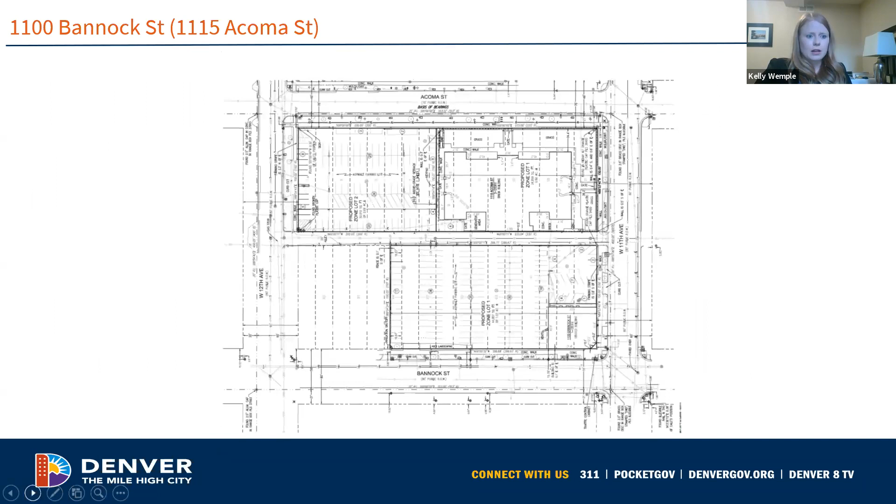All right, so next up we have one public hearing scheduled today. So the process is up on the screen. You can see, I'll go ahead and announce the public hearing, and then staff will introduce the application and make their recommendation. Following that, we'll have the applicant presentation, and you have up to 10 minutes to present. Make sure to get it all in the 10 minutes, because once we hear public comments, we won't be able to come back and talk to you after that. We'll move straight into deliberation. So after that 10-minute applicant presentation, we'll open it up for public comments. For public hearings, we have 3 minutes each for public comments.

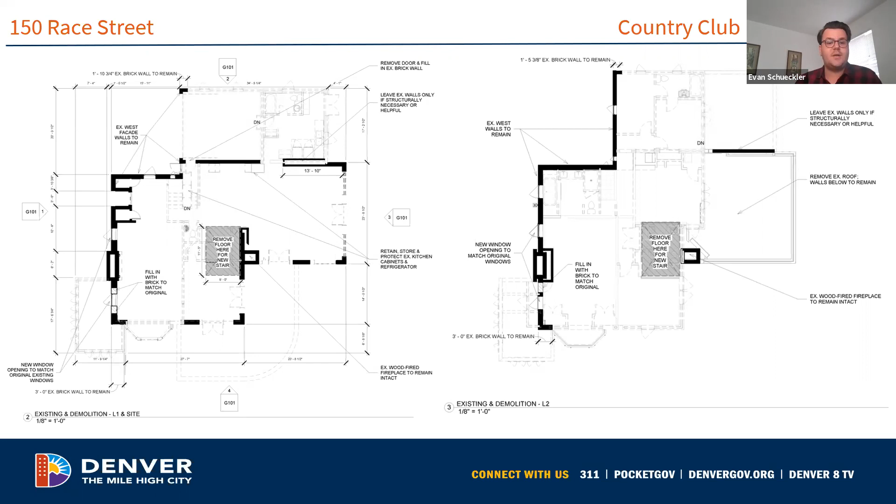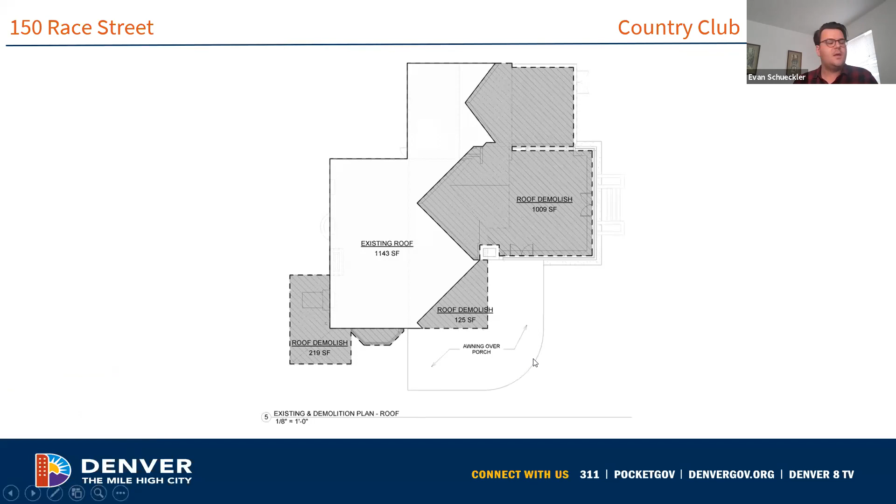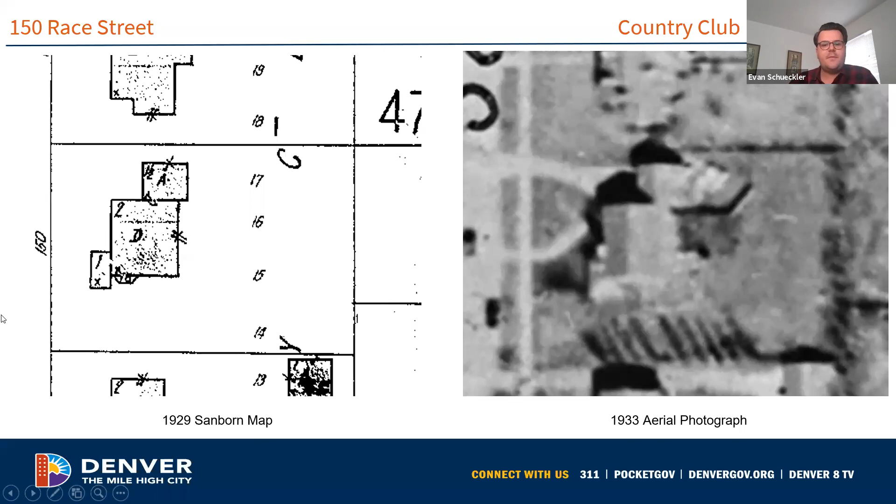In reviewing the available information, staff have found that the existing front addition and bay window at 150 Race Street should be considered historic, having been constructed within the period of significance in the same style as the main portion of the house, and given that they retain integrity. At this time, the front addition and bay window are both at least 92 years old and were present on this house for at least 19 years of the period of significance.

Per design guideline 2.29, which states that one should preserve a historic addition that has achieved significance in its own right, staff are recommending that both the front addition and the bay window be retained, though the commission may wish to debate the merits of the front addition and bay window's historic integrity and significance.

Given that the majority of the rest of the demolition has concentrated at the rear of the structure and will have no impact on the street-facing west facade, staff are recommending conditional approval of the partial demolition.

I also want to note, as of 5 p.m. on March 23rd, the day that the staff report and application materials were uploaded to the LPC website, staff received 12 letters of support for this project. These were provided along with those materials on the website. Since then, staff have received an additional 6 letters of support, which were forwarded onto the commission directly yesterday evening.

I also wanted to touch on, prior to this meeting, I received a couple of questions from Kelly regarding whether or not we had any information about the condition of any covered masonry, that being the masonry that would be covered by the front addition. We do not have any information on that. I'm not aware of any investigative demolition that the applicants undertook to look at what may have been the original facade of the house.

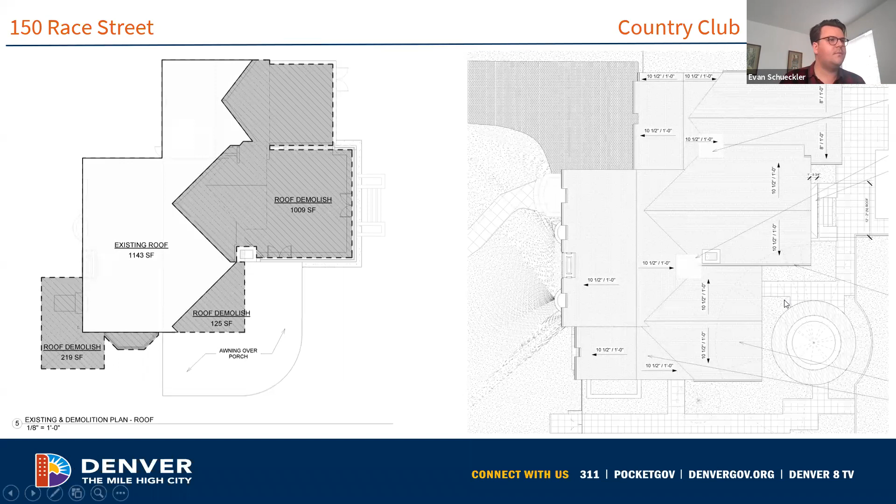The proposed detailing of the addition is compatible with the Tudor Revival character of the historic house. The addition will be constructed from brickwork matching the existing house, with simple eave and rake details like those found on the primary house. The fenestration will be composed of groupings of tall and narrow casement windows and doors, along with a second-story square projecting bay window with a flared copper roof. The covered porches will be supported by heavy timber posts and beams with curved brackets, proposed to be from reclaimed wood. Overall, the detailing of the addition is highly replicative and includes Tudor Revival details not found on the historic house, potentially creating a false sense of history. However, these details are found on other Tudor Revival houses in the district, and the Country Club design guidelines do allow for more ornamented additions than the citywide guidelines.

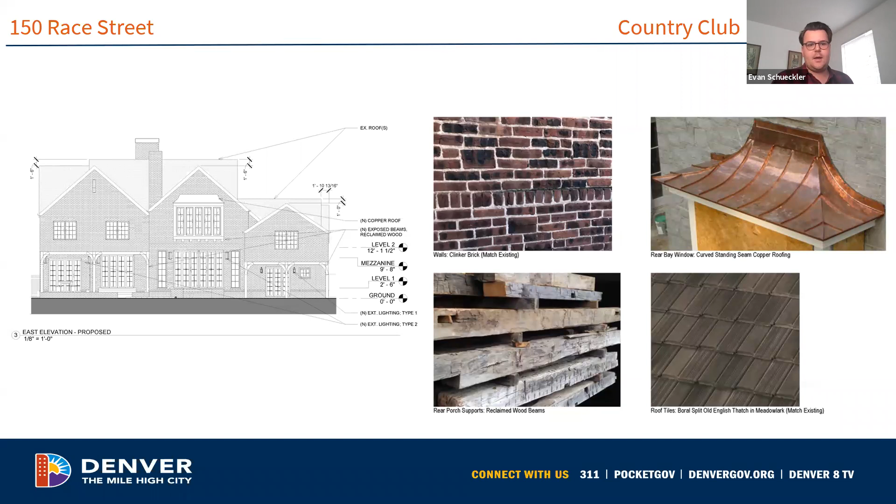The street-facing wall of the attached garage will retain the original opening size and overall dimensions, with the northern addition being set back approximately 1 foot. While this setback is minimal, the garage itself is substantially set back from the front of the house, and the addition will be minimally visible.

At the south elevation, the applicant is proposing to construct a 12-foot wide addition that will be set back just under 3 feet from the front of the house. The addition will be 1.5 feet lower than the main mass of the house and will feature a small wall dormer similar to those existing on the front of the house, and French doors opening onto the front yard.

The south side of the addition features groupings of tall and narrow casement windows and part of the proposed covered rear porch. While the detailing and proportions of the proposed south addition are compatible with the historic house, staff have found that the addition is located too near to the front of the house and is not subordinate.

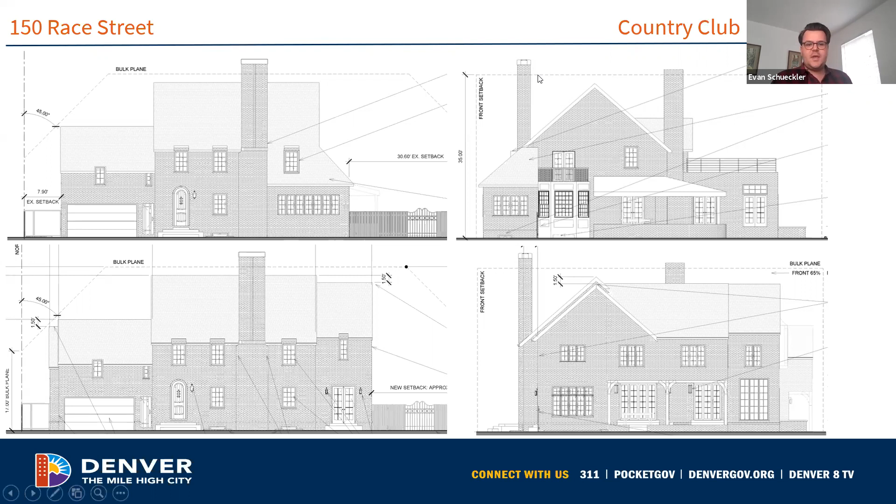Along with the addition, the applicant is proposing to replace all of the existing windows on the historic house. All but two of the windows to be replaced are non-original. The two original windows are located in the northwest interior corner of the house between the main mass of the house and the garage wing.

As the design of the most visible portion of the addition at the south side of the house is reliant upon removal of those historic features previously discussed, and we find that the south addition is located too close to the front of the house, we are recommending denial of this addition.

Just to comment on the public comment we received: prior to March 23rd, we received 12 letters of support. Since then, an additional 6, all of which have been provided to you. Those letters don't distinguish between the demolition scope and the addition, so you should consider those as being related to this project as well.

Happy to answer any questions.

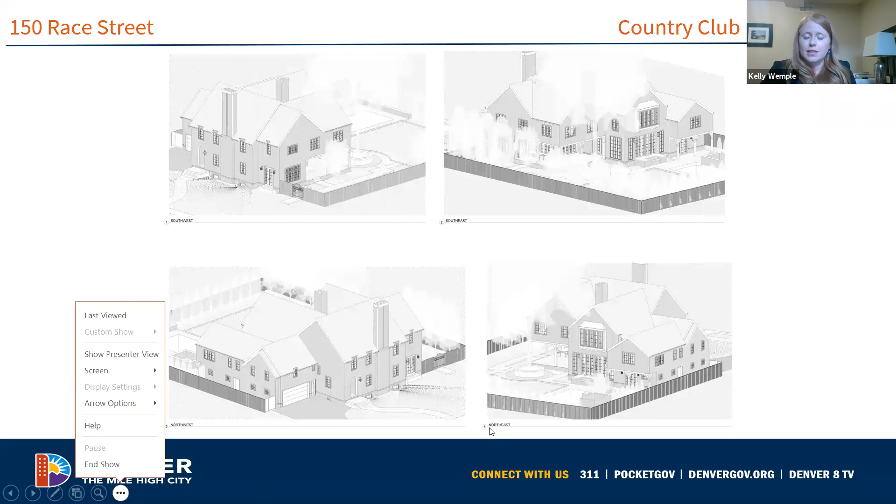It won't let me start the video for some reason. Do you have a capability on your side? Let me try that. Sorry, I'm trying to start my video and Evan and I were battling with the mouse. So hold on a second. I don't know why it's not letting people start their video today. There you go, you're in.

Okay, thank you. I obviously had a different presentation considering your discussions.

So I will tell you what I was going to say and you can take it from there. The addition we are proposing has several key elements that drove the outline and massing and seek to uphold landmark and country club guidelines. We will preserve the lot size and shape, the landscaping and hardscaping, most notably the large deciduous tree to the east of the porch.

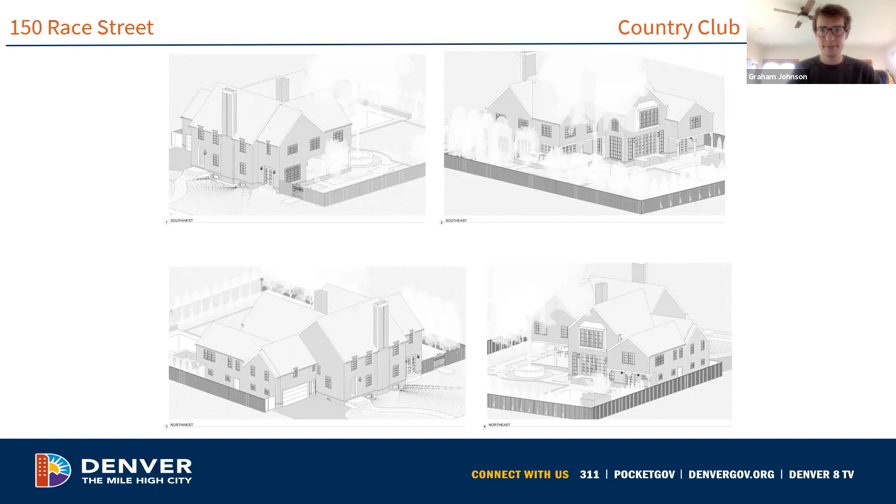So we will see you back when you've had time to address those comments. The next project on our agenda.

Kelly? Oh, yeah, she has her hand up. So would you like to just address? Oh, sure.

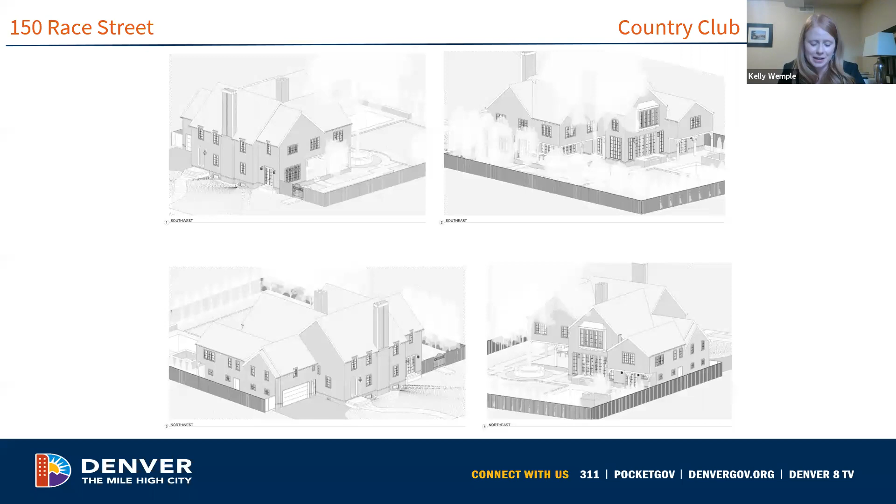So the next project we have on design review is 2020-COA-187 at 301 High Street. And we've got Becca, take it away.

Good afternoon, everyone. So this project, as Kelly said and Graham mentioned, is at 301 High Street, just up the street. The original submission was approved by the Landmark Preservation Commission on the July 7th, 2020 agenda, and so this is a revision to that.

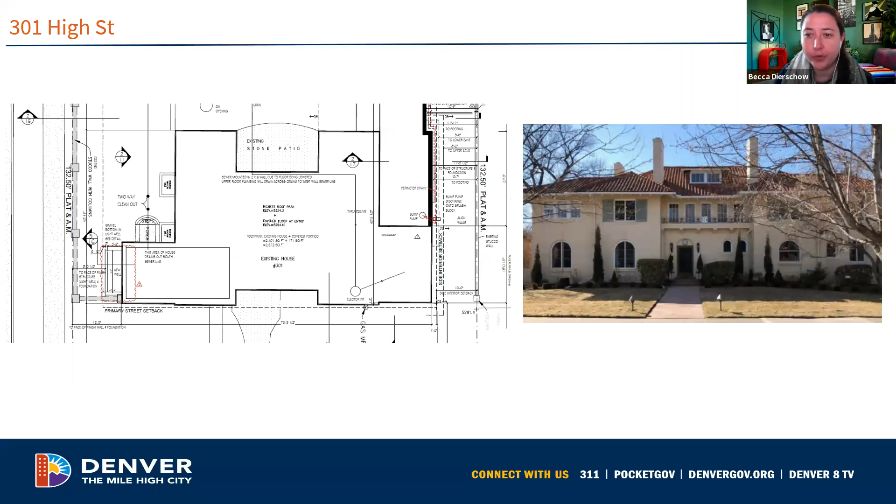It's not a whole new scope, there's just one small change they'd like to make. The original submission approved by the commission called for lowering the sill of an existing basement window on the south facade of the structure to allow for an egress window.

As you can see, this is the south facade, and that window is what we're talking about. The current revision, what you see before you today, would like to add an additional window on either side of this approved egress window with a large window well for light and access.

So staff does have some concerns about this proposal to widen an existing basement window into a larger expanse of glass near the front of the house. While the guidelines do allow for flexibility on facades that are not readily visible, staff is concerned about the location of this change, which is near the front corner of the house. However, we do want to note that there is an existing stucco wall that obscures the changes from being readily visible from public vantage points.

The design guidelines list 4 factors to consider when determining if a level of change is acceptable for exterior changes, and Kelly kind of stole my thunder listing these out last time, so I'll be brief. But the 4 factors are: the impacts on the character defining features of the building, the impacts on the preservation of a structure's overall form and mass, the visibility from public vantage points, and the significance of the structure, noting that a property with a high level of architectural significance on all 4 sides. This is not an individual landmark.

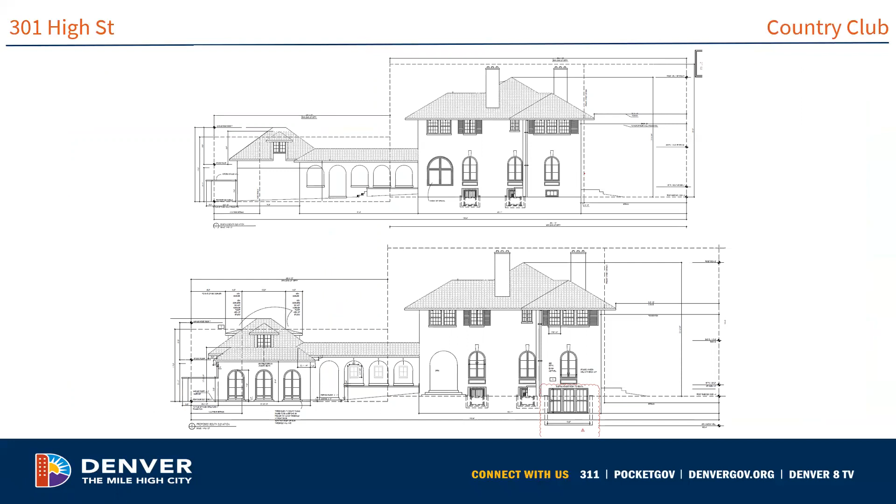Thank you, Kristen. Are there any questions for the applicant? No, you answered mine during your presentation. I couldn't recall whether that stucco wall was historic or not. Sounds like it was, or is, I should say.

Anne, did you have a question? No. Gotcha, I saw you unmuted. All right, well then thank you for your time.

Are there any public comments? Just a reminder, if you're joining us via computer, please use the hand raise function. I don't see any hands raised. Okay, so that's a no. Not many comments today, all right.

Then let's move into deliberation. What did everybody think about this?

Kelly, Brad, this is Brad. I'll kick it off. I mean, I just looked at the guidelines, and I think I'm in agreement with staff's recommendation. I think it's pretty clear about not enlarging historic openings and aligning a new basement window, looking at 2.18B. So I just don't see this meeting the guidelines, I guess, to summarize it quickly.

Seems pretty straightforward to me. Gary? I agree. I completely support the staff's recommendation for the reasons both stated in the report and the ones that Brad just made.

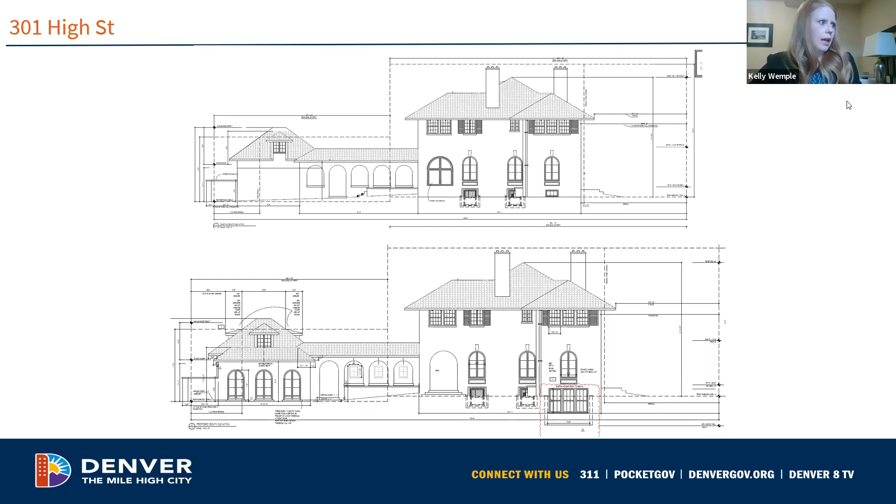Okay, the next project on the agenda is 2021-COA-169 at 401 Race Street. Brittany, can you hear me? Great.

So we're staying within the Country Club Historic District, and this application is for retroactive approval for vertical wood siding on some bay window additions, to an addition staff administratively reviewed and approved at the rear of the structure, alterations to the site, and a new shed structure.

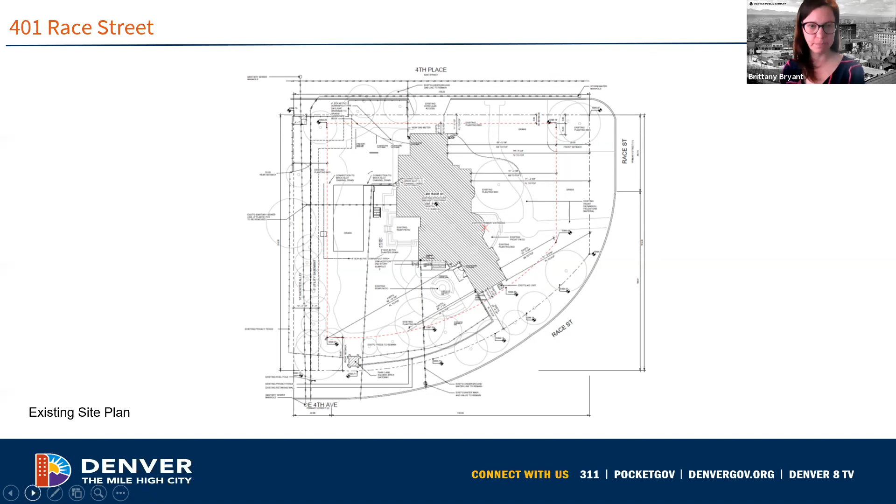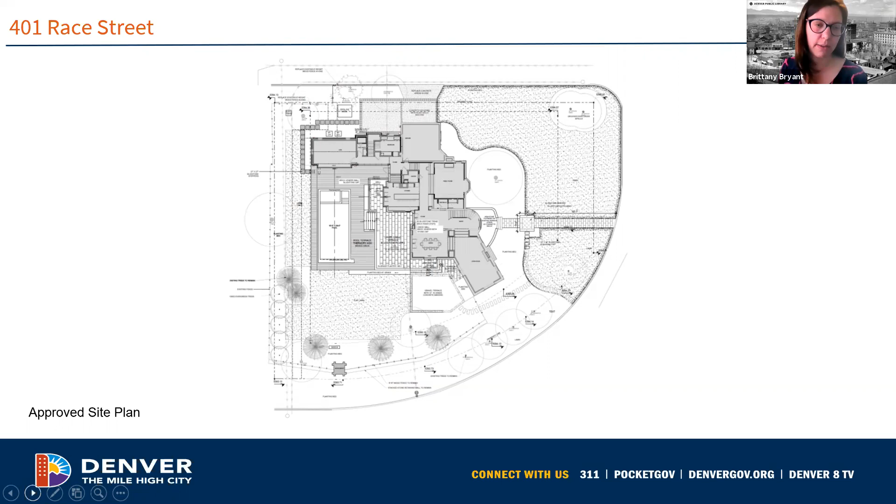The mechanical units are not shown on this approved site plan, so that is another retroactive approval that the applicant is requesting approval of today.

Staff are still in support of the rear patio and feel it will have a minimal visual impact on the surrounding historic context. I'm going to annotate these plans to show it a little better.

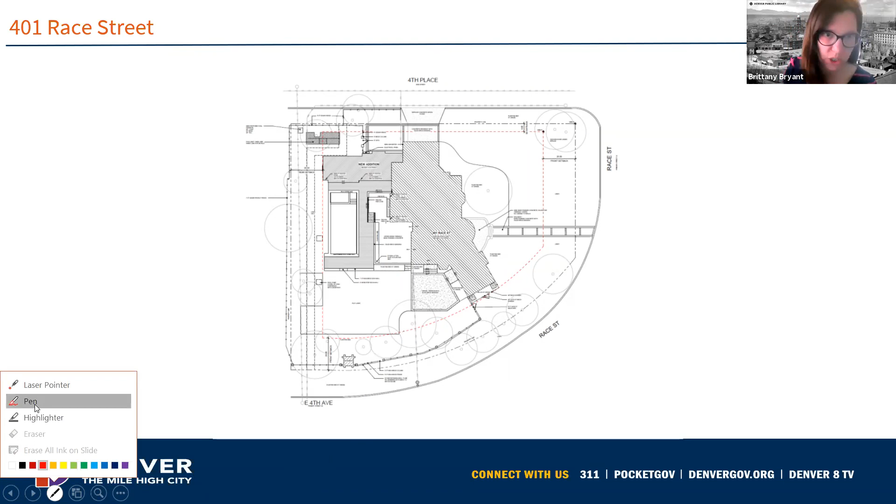Over here where Race Street starts to curve around, at this 90-degree angle, there was an existing mechanical unit, and the applicant added a new mechanical unit. Both units are screened by a low fence that blocks their view from the public right-of-way. Since there was an existing unit here, staff feel this is an appropriate location for it. Due to all the frontages of this property, it's very difficult to place everything totally in the rear where it's not visible from the public right-of-way.

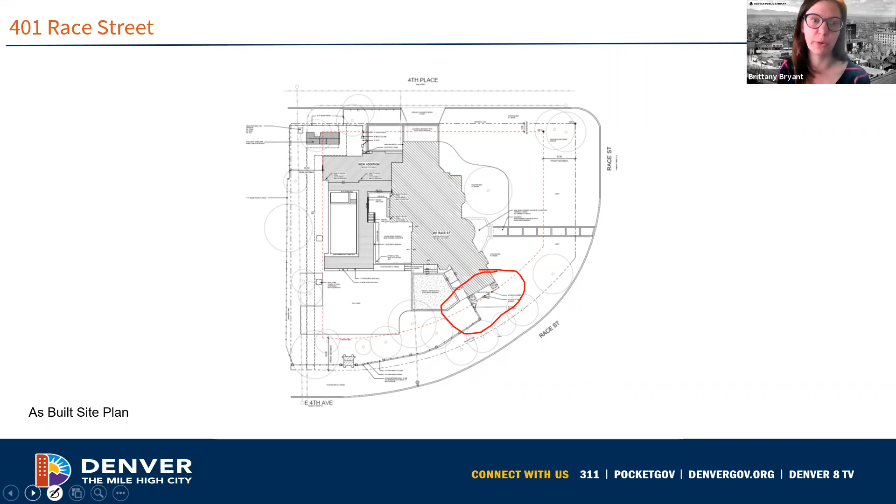The applicant screened that with a design similar to the fence design along East 4th Avenue and Race Street, which the commission previously approved for fencing on this property. I do have pictures of that to show you later on.

What we're talking about today is this rear addition, and in particular these bays on it. Landmark staff had previously approved these bump-out bays to have horizontal wood siding, but the as-built conditions have vertical wood siding instead. We're not actually looking at the addition itself—it's already approved—we're just looking at the material cladding on those bump-out bays.

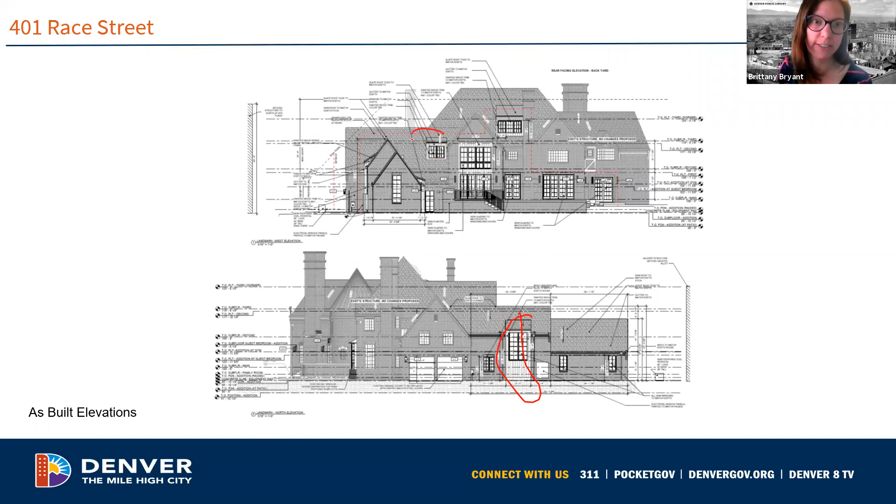And again, we're talking about the cladding material on this bay here, which is vertical. Also on the rear elevation, there are two dormers, one here and one here, that had that vertical cladding material applied to them. So those are all of the alterations we're talking about—the cladding material being changed.

The applicant also had approval for wood replacement garage doors. The garage doors weren't historic, and Landmark staff approved a wood carriage house door, but a steel roll-up door was actually installed. So the applicant is also requesting retroactive approval for that different material cladding on the garage door.

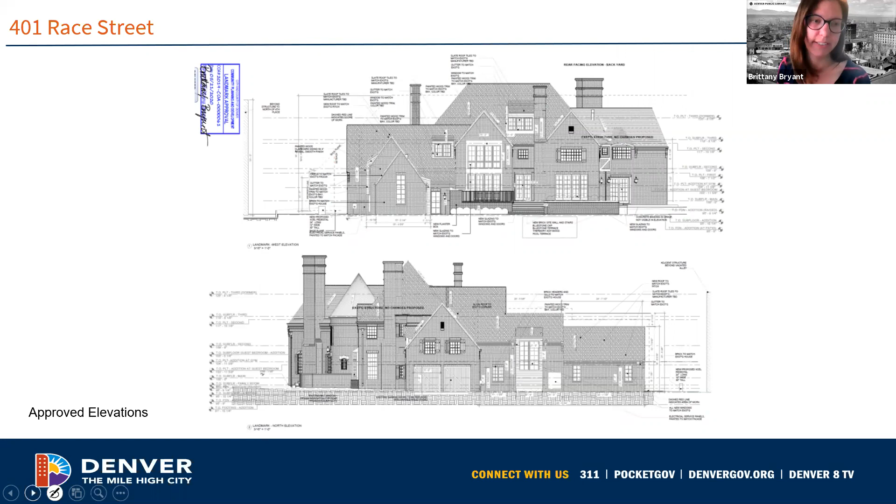Again, this is just the approved plans. You can see that wood carriage house style door and that horizontal wood siding.

Additionally, the applicant constructed a shed structure on the property. This shed structure is the pool equipment room, located at the rear of the property along East 4th Place, and it has the same vertical cladding used on the bump-out bay windows of the structure.

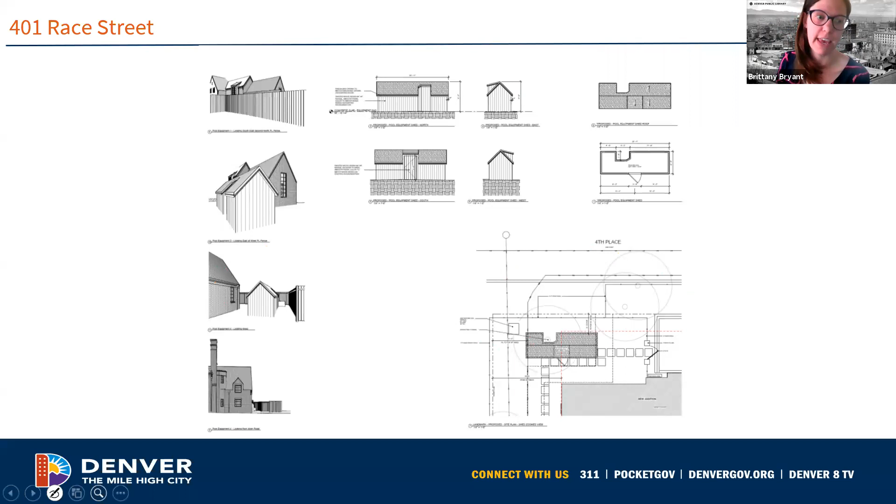The Country Club design guidelines do talk about differentiating the walkway material and the driveway material. However, the walkway and driveway are on two different street fronting elevations, and you will never see them together. So whilst they're not differentiated, you don't really see them collectively as one unit.

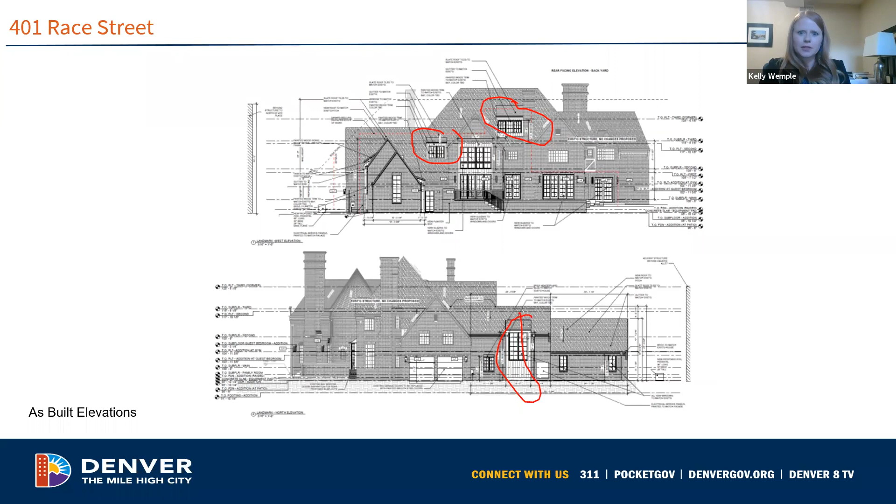All right, then let's go ahead and move into deliberation. Is everyone in agreement with the staff report? Madam Chair, I am in agreement. Okay, was that Julie and Brad? Yeah, I'm in agreement as well. Great, I see a lot of nodding heads.

I just want to weigh in again. I'm always unhappy when we find ourselves approving something that is not within the guidelines that came up as a violation. It's not that I wish people to undo work, but there's a process here, and every time we do this, I feel it sends us down a path where things can be done that are not up to the guidelines if you build them first and then have them come up as a violation. I understand the shed can't be seen, but I still feel it's worth making the comment that this is not really the right way to proceed in a historic district, especially since the applicant has clearly gone through the process before and knows what it is, and has been diligent about it, but things just get built.

So that's my statement. Okay, thanks, Anne. I will just mention that I think the staff report outlines that this is meeting the guidelines, so I'm not concerned about approving it considering it's meeting the guidelines.

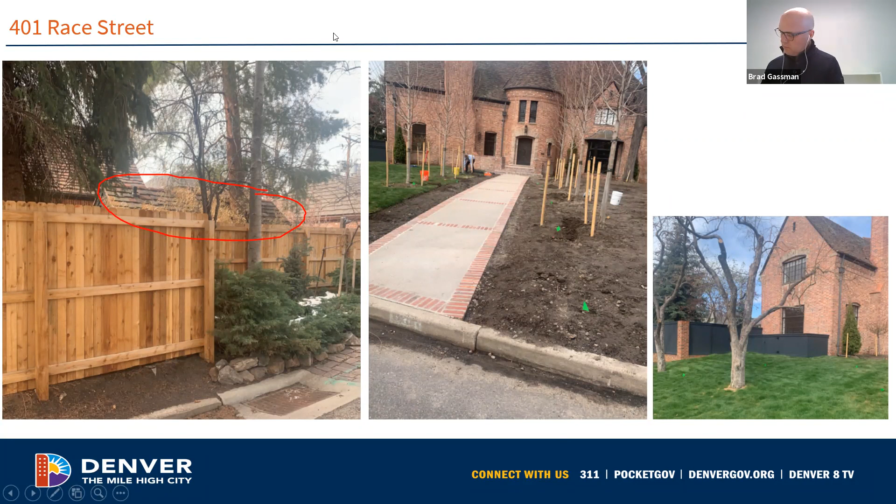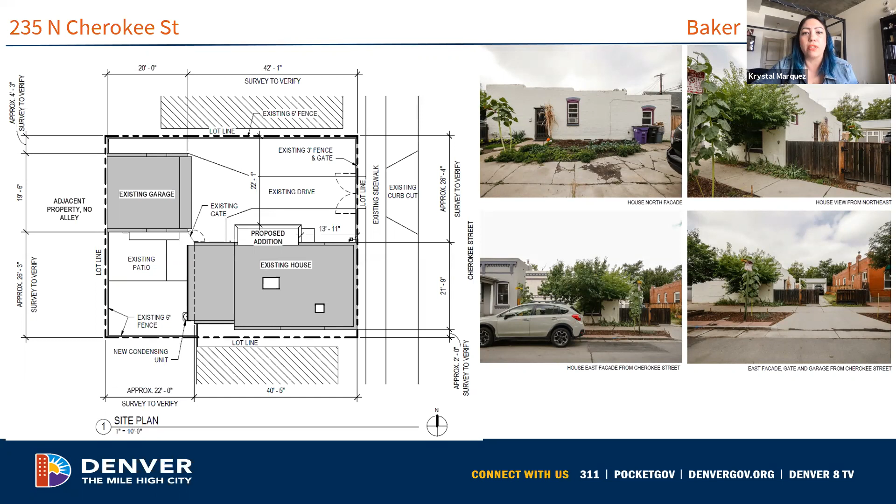Here you can see where the small proposed addition is for this structure on the site plan. And to the right are existing photos of the property showing the front facade, driveway, and garage, as well as the north facade.

So here you can see the demolition plan for the site and where demolition will occur on the primary structure and garage elevations. Approximately 15 feet of the north wall of the primary structure is proposed to be removed to add this small 64 square foot addition, as well as an original window opening to be removed with this demolition. The existing front door will also be replaced. On the south elevation of the primary structure, one non-original window is to be removed and the opening enlarged to add a new window.

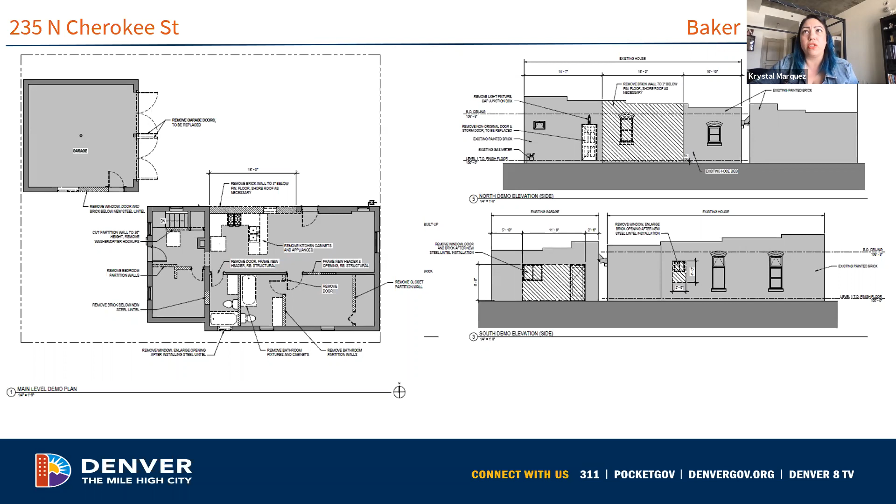And on the garage elevation, south elevation, they are proposing to remove 11 feet 8 inches of the wall to add in sliding glass doors.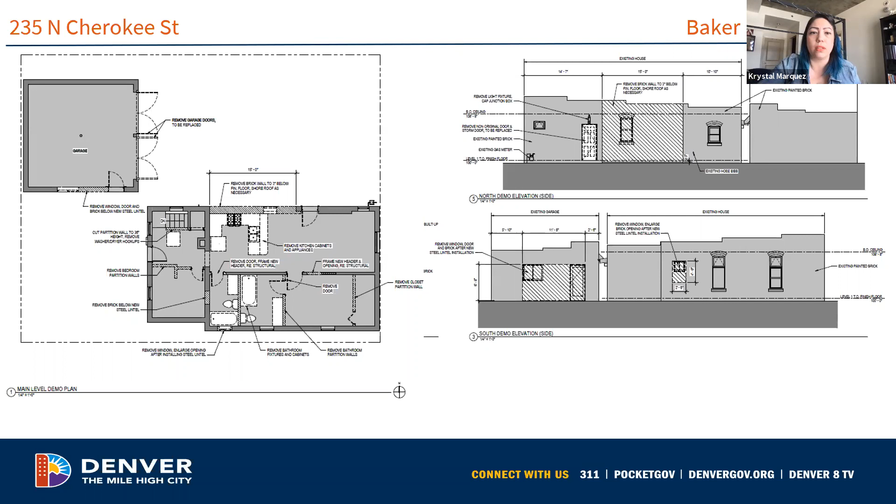So here are some of the alterations to the primary structure, which includes adding a small side addition that extends out 4 feet 3 inches from the primary structure to expand the existing kitchen and dining area. For the new addition, they're also proposing to add a steel canopy over the front door entrance and replace the existing main entrance door with a new solid wood door and storm door.

Two new skylights are also proposed to be added to the roof. You can see those at the rear elevation, but also on the roof plan in the application. You can also see they'll be adding new, more modern aluminum clad wood windows at the addition, which is proposed to be clad in a charred wood lap siding with a 4-inch reveal. And here in the photo, you can see the one original window opening that they are proposing to remove.

So additional alterations to the south elevation of the primary structure include that new window to be added where the other one's going to be removed, and they're going to enlarge that window opening. All windows and doors on the structure in the photos appear to be non-original, so staff has no issues with that. Alterations to the garage include new sliding glass doors with a steel canopy over them.

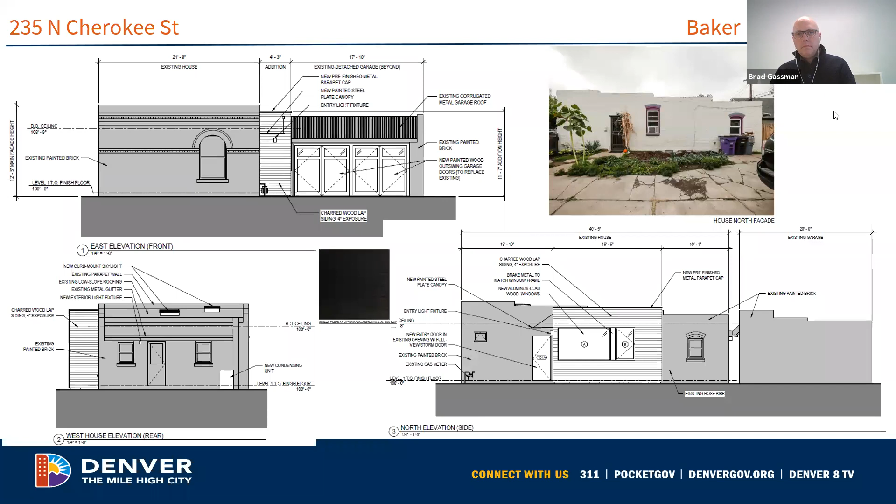Does everybody agree with that? Just nodding heads. Okay.

Well, I agree with what's been said. The only thing I'll add is we did, recently, maybe in the past 12 to 18 months, approve the use of shou sugi ban, which is also charred wood, in Baker. I'm not suggesting that's a precedent for this because I believe that was an ADU at the rear of a property, so it's a different application. But I wanted to point out that since we've approved it once before, and it does essentially look like it's painted lap siding of the exposure we typically approve, I'm comfortable with it.

Well, if there are no further comments, who would like to make the motion? Madam Chair, I'll make this motion.

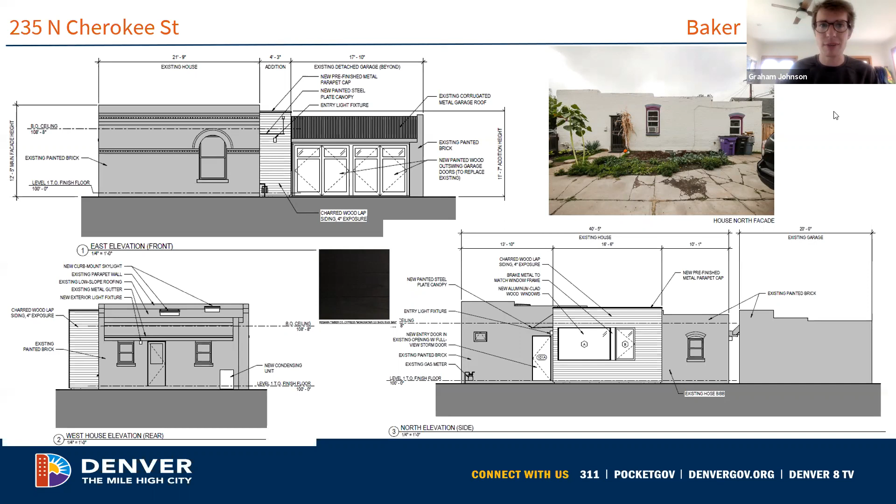Scroll to the right part of the page here. I move to approve application number 2021-COA-175 for the addition and alterations at 235 Cherokee Street, as per design guidelines 2.14, 3.1, 3.2, 3.3, 3.4, 3.5, 3.6, 3.7, 3.8, character defining features for the Baker Neighborhood Historic District, presented testimony, submitted documentation, and information provided in the staff report. Thanks, Graham.

Do we have a second? A second. Thank you, Gary.

All right, I will call for the vote. Brad, aye. Graham, aye. Julie, aye. Gary, aye. Erica, aye. Anne, aye. Kelly, aye. All right, so we have a unanimous vote and the project is approved.

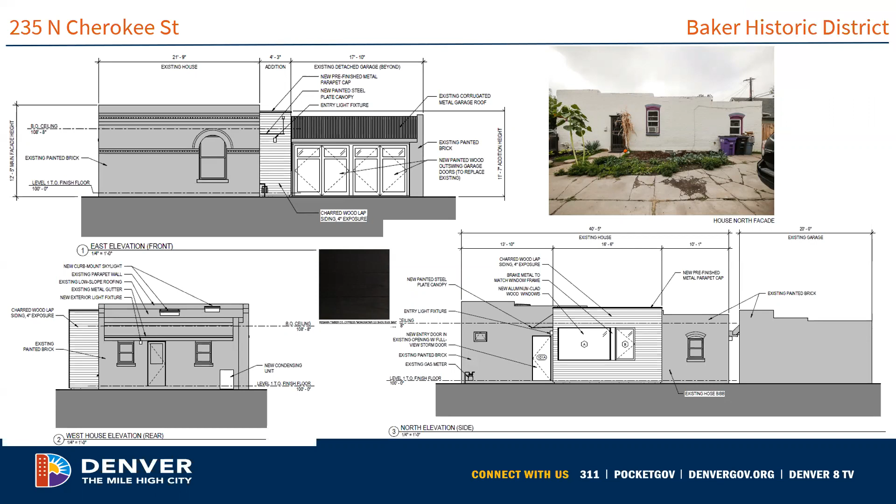Okay, moving forward, our next project up for design review is 2021-COA-170, at 2645 West 34th Avenue, and Brittany will be presenting the project. Our next project is for a retaining wall replacement within the Potter Highlands Historic District. This is a mid-block property, and you can see the existing retaining wall, which is a timber wall, in the street view here.

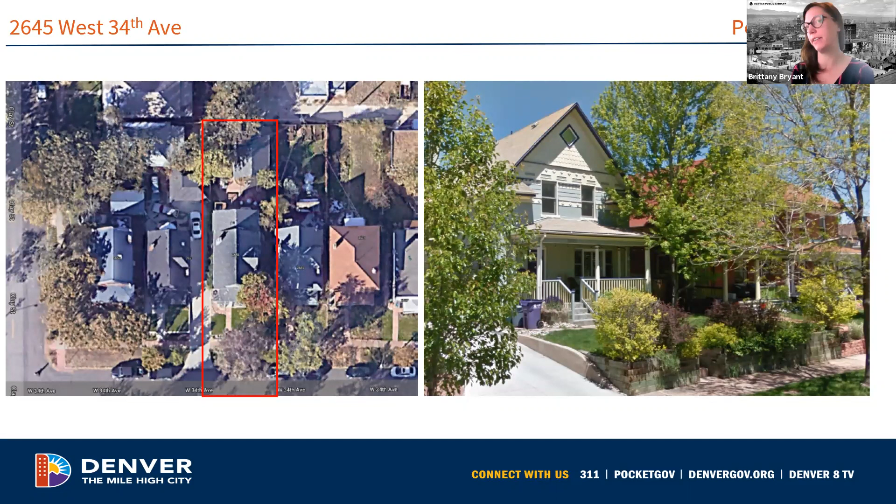It was a little difficult for me to get clear photos of this, but there is also a timber planting bed in front of the porch, and the porch foundation is concrete. I don't have the best photographs to show that, but that is the current existing configuration.

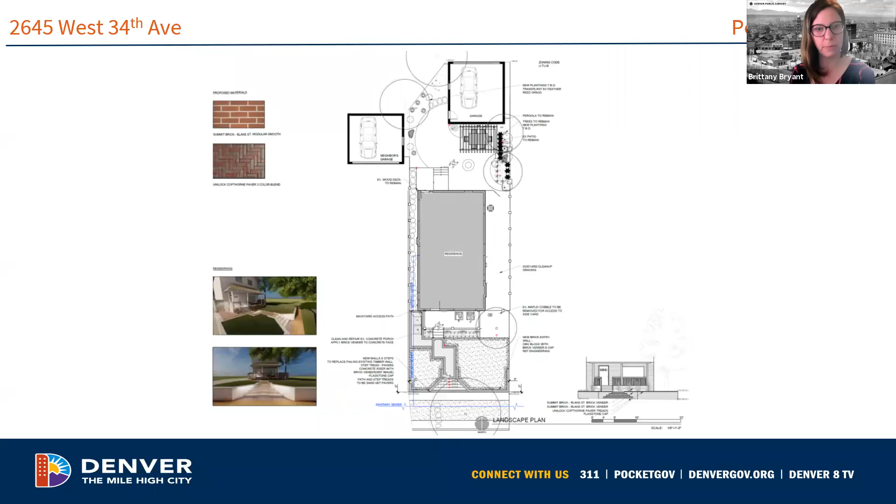So this is the existing site plan. Here you can see that timber retaining wall and the straight walkway that the applicant is proposing to replace. This also notes that timber planting bed just in front of the porch, and the applicant is proposing to replace all of that with a new CMU block retaining wall that will be clad with a brick veneer.

It should be clearly noted in the plan set that it is a standard brick, and that the brick will be painted to match the existing brick if the commission does decide to approve this application. The retaining wall will have a large apron at the sidewalk in it. This is a configuration that the commission has previously reviewed and not approved, as typically the commission likes a very simple retaining wall design up at the sidewalk edge.

Due to the apron in the retaining wall design, we believe that the applicant is needing to Z-jog the new walkway, and the new walkway will be a modular paver in a herringbone pattern that you can see pictured here. And then that timber wall and planting bed in front of the porch will be removed, and the porch foundation, which is concrete, will be clad in brick. Again, that should be confirmed that that is a standard brick size, and the brick will be painted to match existing.

So this is primarily just site work, and we are recommending approval with conditions, and the conditions be that all brick veneer is a standard size brick and painted to match the existing brick, eliminate the apron in the retaining wall design, and then eliminate the Z-shaped jog in the walkway and use a straight path, because historically pathways and walkways from the sidewalk to the front door are located in a straight path. I do see that I did not put my conditions in the suggested motion, but they're just above that suggested motion if the commission agrees with those conditions.

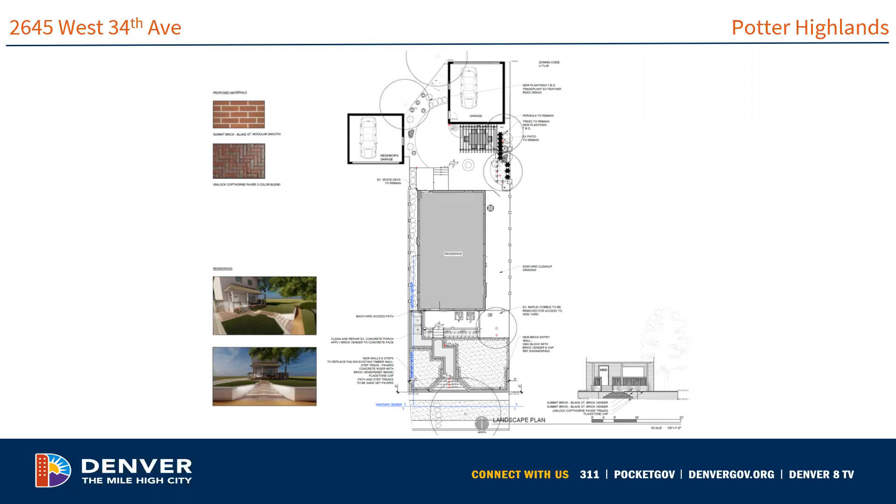Thanks for the question. Yes, thanks. Any other questions since we've got the applicant back? No? Okay. Thanks for the clarifications.

Okay. Then Brittany, did you have anything else to add before we deliberate? Nope. Okay. All right. What does everyone think? And we don't have Aaron today to look at the site work, so that's a bummer. Julie, what do you think?

Yeah, I actually like it. I agree with staff, though. Let me get my thing up. I was a little worried about the Z-jog thing in the front lawn, and I was wondering what others thought about that. A part of me thinks it's really fun, and I appreciate the creativity, but given the design guidelines, I was kind of curious what others thought about that.

Julie, I think my bigger concern was the apron. I feel like the steps that are there, the flagstone that exists, has a really nicely tooled face that's pretty typical of historic flagstone steps. I think there's at least a pretty good case that those stairs were originally there, not only based on neighborhood context, but that historic material - it is narrow, and I understand that's not 100% convenient, and that a new puppy might make that exciting for sure, so noted here. But I think the offset further up and away from the sidewalk and the right of way is less impactful to the streetscape there. And I felt like the narrower entry sequence was maybe a spot to focus on. So I'm curious to hear what others think as well.

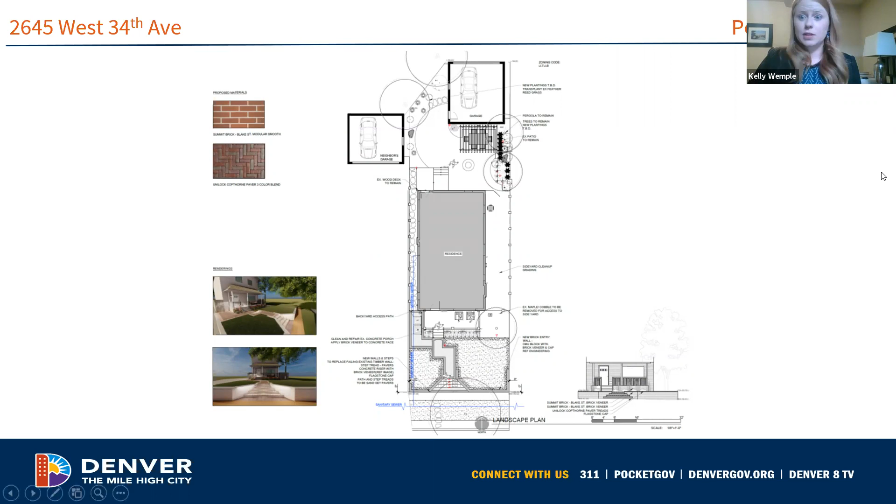So this is our last project on design review, it's 2021-COA-171, and the address is 2540 California Street. Graham, you have to leave, right? We need to jump out. We almost snuck them all in, but sorry to have to leave for the last one. We'll catch everybody next time. All right, thanks, Graham. You bet. Bye.

So our next and last application is for demolition of an existing alley structure in the Curtis Park Historic District and replacement with a new infill single-family residence with detached ADU.

But additionally, staff did evaluate this just a little bit further to ensure we are comfortable with the demolition of the structure. And we feel that with all the alterations to the structure, with those front and rear additions, it just doesn't reflect integrity of the era and also of the reasons why this portion of the Curtis Park Historic District is designated. So we do feel that demolition of the existing structure is appropriate.

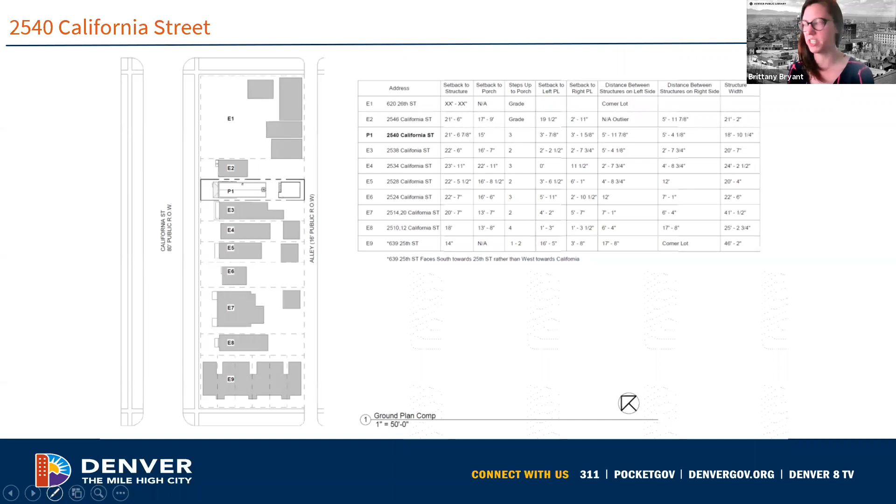The proposed structure is 18 feet wide, and 57 feet and 6 3/8 of an inch in depth along the lot. 18 feet is slightly narrow, however this is a 25-foot lot, and due to setback requirements of the current zoning code, this is about as wide as you can get on a 25-foot lot in the city of Denver. So it will have a setback similar to the surrounding structures and a porch projection similar to the surrounding structures.

This is just the ground floor plan, and you can see that the proposed ADU is separated from the primary structure by 15 feet, 7/8 of an inch. This is almost the minimum separation required between those two structures.

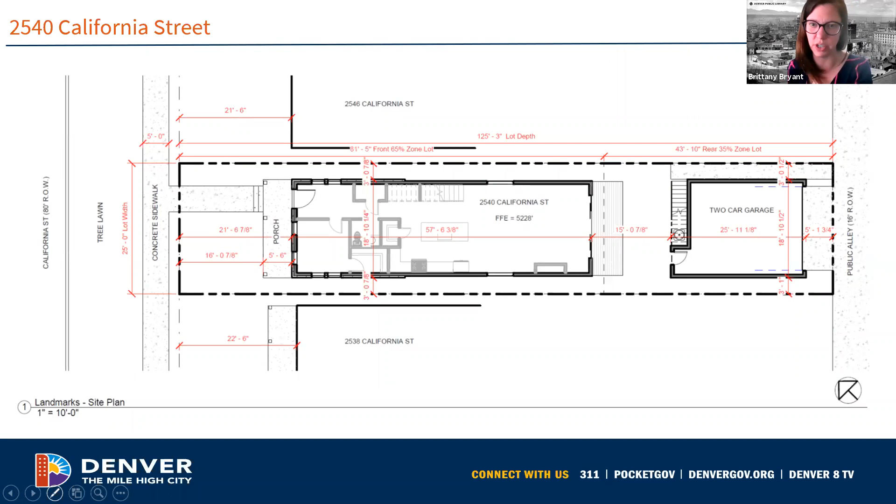However, I do want to pause on the ADU footprint as it's slightly L-shaped. It will have a little bump out on the first and ground floor of the ADU on the north side of the lot that we have some concerns with, more about how that bump out articulates the exterior facade and not so much it having that bump out. But you can see that a full width porch is proposed, and a straight walkway is also proposed to the structure. The primary structure will be located totally within the front 65 of the lot, and the secondary structure in the rear 35 of the lot.

This is the second floor, and this proposal will have a rooftop deck. That rooftop deck will be accessed by an exterior spiral stair at the rear of the building that you can see shown here. The rooftop deck is located on most of the roof of the structure. However, this building will have a slightly high parapet to provide screening for that rooftop deck, which we'll see in elevation in a second.

And again, you can see that kind of L-shaped footprint of the proposed ADU. The ADU will also have an exterior stair that will then also have a kind of exterior storage space.

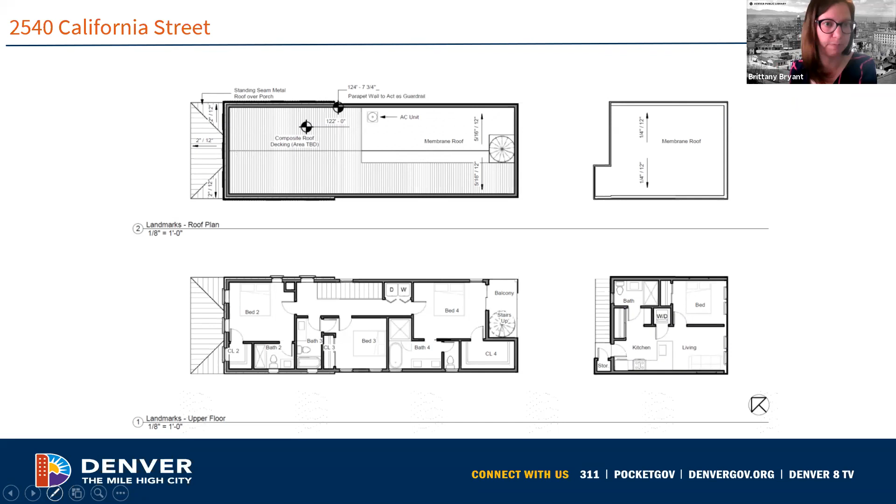So here's the primary elevation of this structure. It is based on the Italianate form within the Curtis Park Historic District. This structure is proposed to be 27 feet tall, which is in typical ranges of heights within the Curtis Park Historic District. The applicant does have comparisons within their application, however they didn't actually note the height of any of those structures in their application materials, so I went and found those heights for the commission.

2544 Stout Street has a max height of 28 feet. 2542 Stout Street has a max height of 28 feet. 2815 Champa Street has a max height of 24 feet. 2649 Champa Street has a max height of 32 feet, and 2655 Champa has a max height of 33 feet. And finally 2922 Champa Street is 27 feet. So it's right there within typical ranges within the Curtis Park Historic District.

They will need an administrative adjustment for height and bulk plane, as you can see here. That is very common within the Curtis Park Historic District, for the edges of the building to be just outside of the bulk plane. So we are recommending that the commission recommend approval of that height and bulk plane as well.

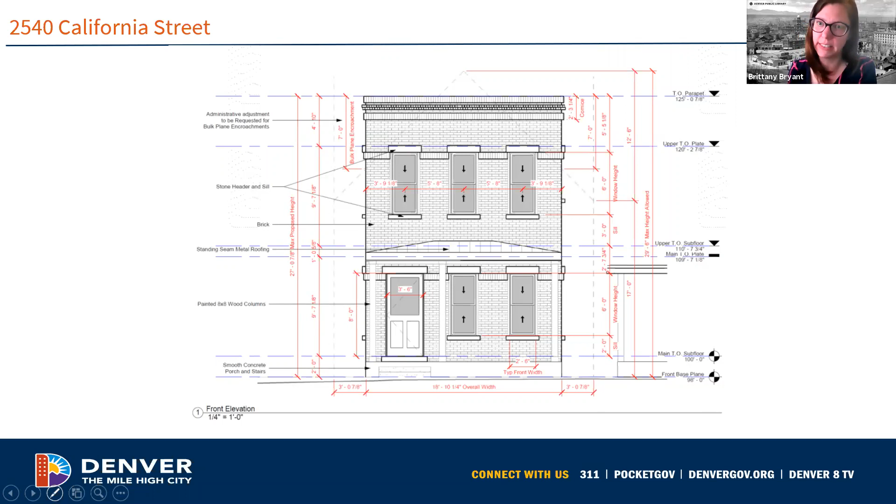In terms of the design, it's very typical Italianate. We just have one comment on the porch design: we feel that the porch slope is quite low compared to what you typically see within the Curtis Park Historic District. Usually there is not as much void space between the top of the roof and the bottom sill of the windows, so we are asking that that be restudied slightly in the phase 2 design detail.

Here are the secondary elevations. The brick will wrap significantly on the side facades, but we will look at that in the phase 2 design detail materials. Again, this building will have a somewhat high building parapet to provide additional screening to that rooftop deck, and you can best see that here in these side elevations where they're showing where the roof level is, and that 3 foot 1 inch tall building parapet.

We don't feel that it makes the building look like it has a, I guess the best way to describe it would be a high forehead, as the building parapet is significantly articulated, and there is a lot of detailing on that building parapet at the top, at least where the brick portion is. So we don't feel that it's creating the appearance of that high forehead.

Window proportions on this building are pretty typical of the Curtis Park Historic District with those tall narrow windows. But here you can see that the secondary facades will have a square window on the ground floor. This will have minimal visibility from the public right of way, so we're not very concerned with that window proportion being irregular. They're actually using the building to enclose that circular stair somewhat, so you won't be able to see it that much from the public right of way, which we do feel is a good way to address those stairs, as we're seeing more and more of these kind of used as accesses to the rooftop deck.

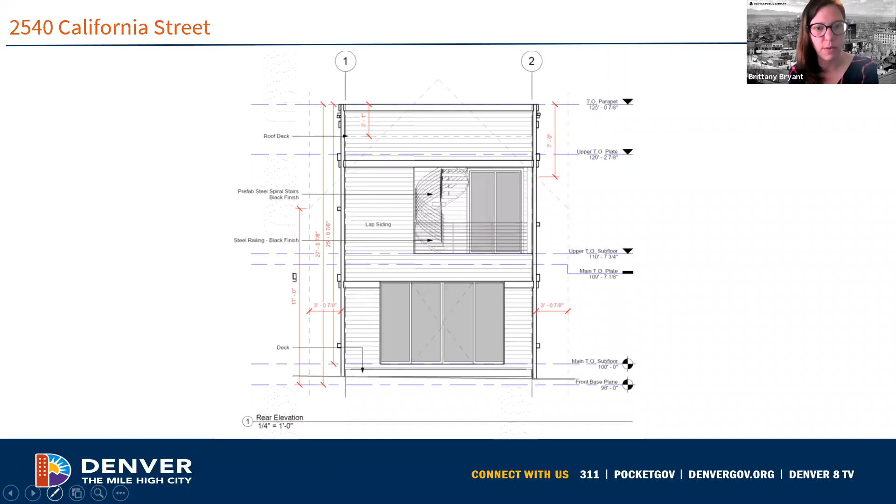This is the rear facade of the primary structure. Again, this building will have that high parapet. It's not as decorative on this rear facade, but due to the limited visibility from the public right of way, we weren't super concerned with that lack of articulation, and we felt it was appropriate design here. So this is the ADU elevation.

Some of these adjustments were made on staff's comments, but we feel that maybe they are not the best comments that we have ever provided to applicants. So we do have some concerns over some of the exterior expression of the floor to floor heights on the ADU and where the second floor banding is.

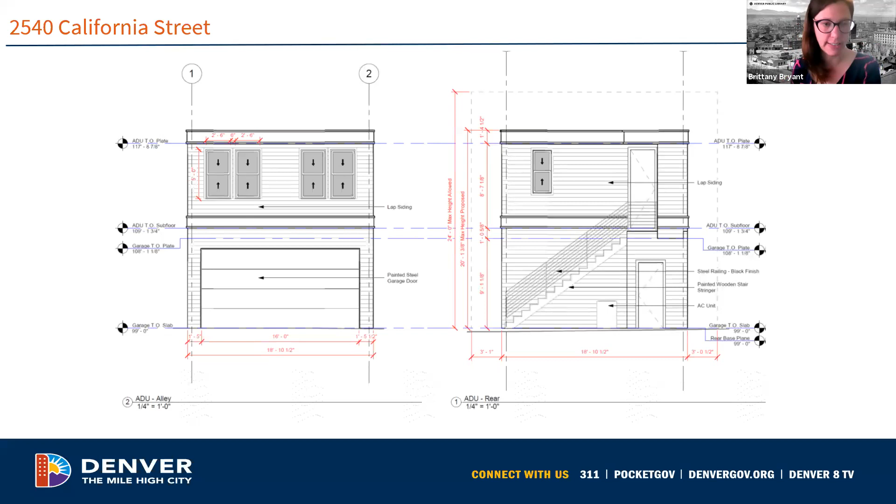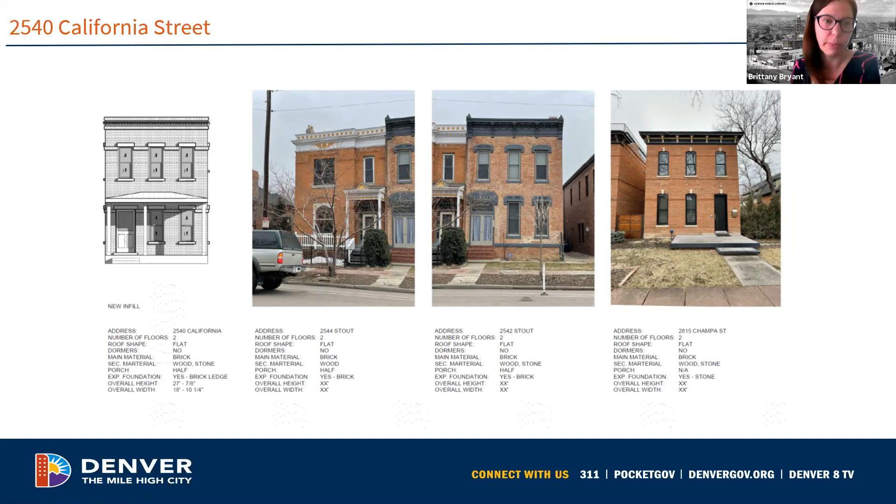So that is mostly it. I do have some comparisons within here, and these are some of the structures that I mentioned that are within typical ranges of heights within the Curtis Park Historic District. I do have all of those listed in the staff report, as they're not actually listed in the applicant's packet. And then here are some just isometrics of the design.

So we are recommending conditional approval of the phase 1 mass form and context, with the condition that the roof slope of the porch be adjusted to hit just under the second floor window sills, as that's more typical of Italianate full width porches within the Curtis Park Historic District.

Redesign of the exterior horizontal banding on the ADU to create a more proportional ground floor to second floor, with the ground floor still expressing a taller floor to floor height than the second floor. And then restudy of the door proportions on the ADU to be more compatible with one another—those would be those man doors on the interior facing elevation. And finally, we do have a letter of recommendation for this proposal from the Curtis Park RNO.

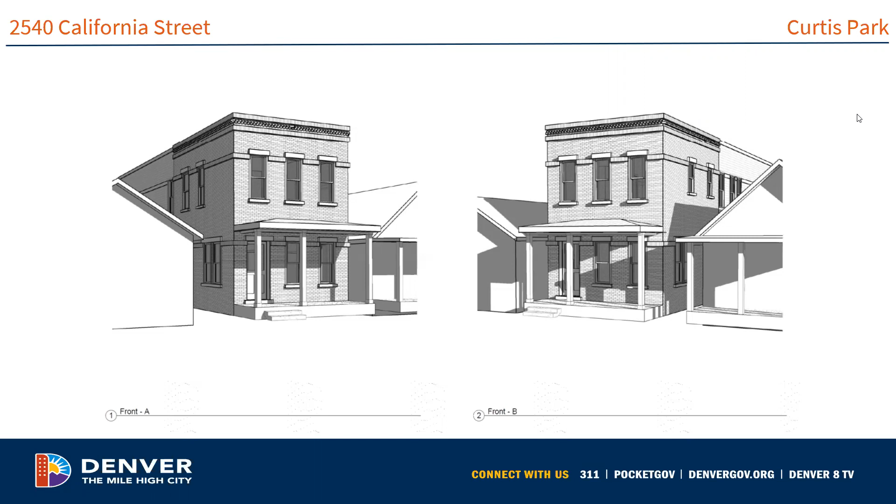Great, thank you. Are there any questions for the applicant? No? All right, everything was clear. Thanks for your time.

Do we have any public comments on this project? Please remember to use the hand raise function. Keith Pryor has raised his hand. You can go ahead and unmute when you're ready.

Hi, Keith Pryor with Curtis Park Design Review Committee. We did review this project, and they did make a lot of changes to really bring this project forward. We definitely agree with staff's recommendation on the conditional approval of the 3 conditions, and we support this project and feel like it's very fitting within the mass and context of Curtis Park Historic District. We would really like to see the commission approve this for the mass and scale and move this forward. Thank you.

Thanks, Keith. Any other public comments? No, I don't see any other hands raised. Great, all right, then let's move into deliberation.

Brittany, could you clarify the condition that the applicant had a question about? Sure. If you look at page L3.2 of the applicant submittal, you'll see what the applicant was referencing about how, particularly on the streetscape, many of the porches within Curtis Park are a bit taller. I didn't include these pages in my presentation, but if you look at page L4.2, there are 2 Italianates with a full width porch, and you can see those porches are also a bit taller. The slope of the roof is pretty minimal, so perhaps it's not adjusting the slope to increase it, but maybe adjusting the height would be a better option than what I initially recommended.

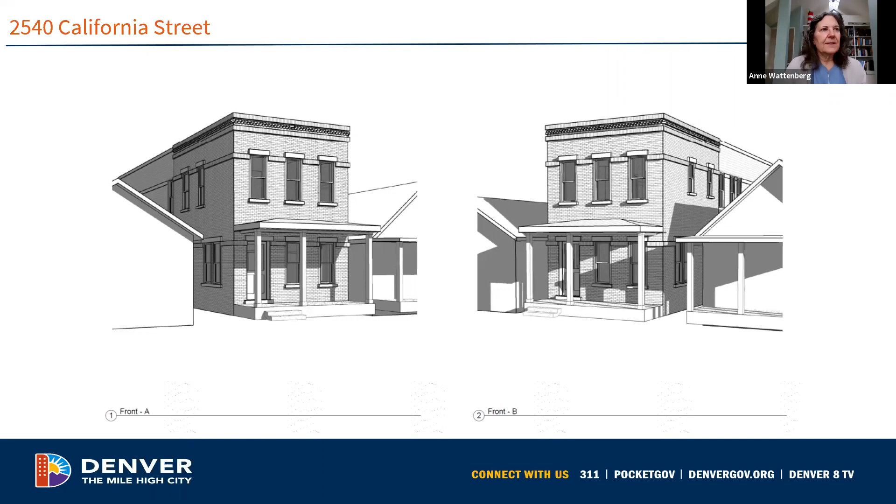I also agree with staff, and I know we're doing mass form and context, but as a friendly comment to the applicant, I think the relationship between the siding portion and the brick portion could use some consideration, and I'm looking at L2.2. I can see in the plan that the siding is offset from the brick, which is a great beginning. But weirdly, and I know detail is coming up next, just to give you a heads up, I think elements are being carried through that don't actually work between the two of them. You might start with the parapet and think about stepping it down a little bit on the brick and on the siding side. I also think the banding that works great in the brick doesn't make sense in the lap siding, where it needs to be amplified, along with the relationship of the windows. So where the openings are, how the massing works is great, but I'm a little curious about how this building was built at the same time and how those two pieces actually relate to each other. I think that would be something to look for in the design detail to be clarified a little bit.

It's a good point to give them a heads up. And while we're talking about materiality, knowing it's going to be reviewed in our next design detail submittal, the RNO letter did mention they had recommended increasing the amount of brick on the sides.

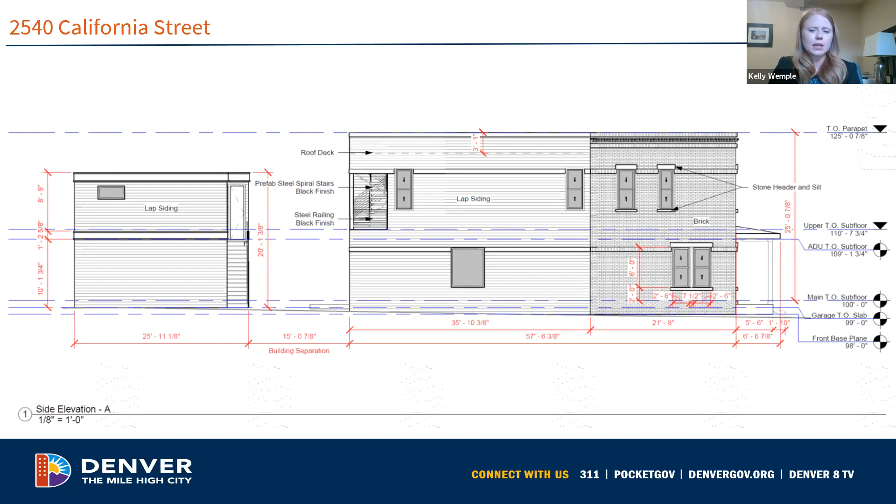So we will see you back for design details. So that ends our design review agenda for today. We do have one discussion item. And I think, Jen, if you wanted to kick this off.

Yeah, absolutely. Sorry, I'm just trying to fix my screen so I can see you all.

Great. So you guys have had a whole lot of long meetings lately, and our current bylaws say that if there's a public hearing, then there can be no more than 6 design review items unless approved by the chair. And for non-public hearing projects, you can have up to 8 unless additional are approved by the chair.

So what I wanted to talk about first is efficiencies in meetings, because a lot of the meeting discussions have gone on really long, and I think we've all been working towards efficiencies, to some success and not success. One of the things we did as staff was talk to everyone about trying to truncate their presentations to be as efficient as possible. I think that seems to be working. There's been a bit more condensing there.

Emily and I have been trying to be more efficient about moving people over and reducing the time there, as well as checking whether people have their hands raised. I'm still trying to pause because people aren't raising their hands, which is surprising me, but I want to give people ample time to react.